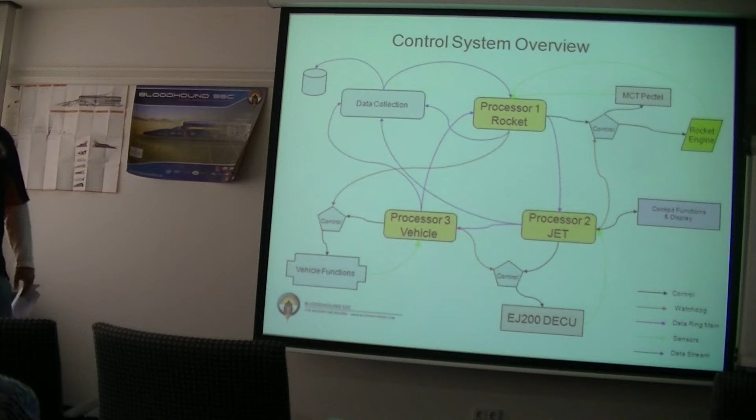All of the computers send data to a central data collection point which is stored locally, and hopefully what they're hoping to achieve, though we don't know if it will be technically possible, is to stream all of the data from the car in real time over the internet, to provide participation for primarily school kids, but of course for everyone.

So they have cable running then? No, that will be wireless.

So if we look at the front wheel assembly, here we can talk about a few things. This is using double wishbone suspension, I think. I'm not sure, I'm not a big fan of that. But the other important things you've got in here, we'll start with the wheels.

For this project, they literally had to reinvent the wheel. There's never been a wheel that's gone 1,000 miles per hour, and the forces on the wheel will be about 50,000 G at the rim. So it's got to be incredibly strong.

Initially they thought they were going to have to use titanium. More recent studies found an aluminium alloy which they can use, which should be able to withstand the forces involved. The next problem is the brakes.

It's a very heavy car. It'll probably be a bit less than 7 tonnes when they want to brake it at the end of the run.

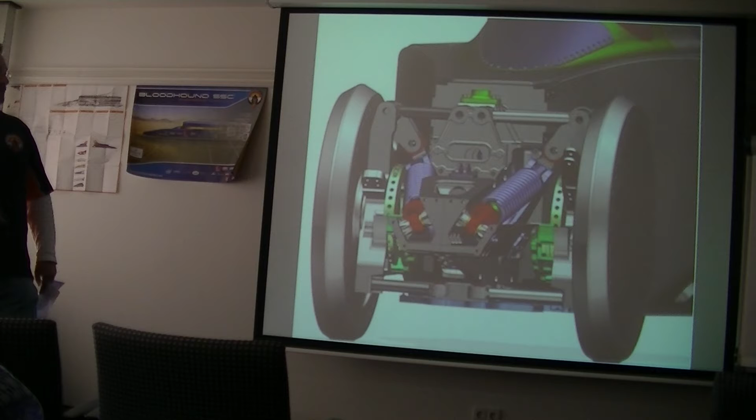So they're going to have to use ventilated steel discs, not dissimilar to what you've got on your own car. But they don't have to be that good, because on the desert, metal wheels on soft sand have almost no traction anyway, so they don't have to brake very hard at the end. Most of the braking, as we'll see later, will be done aerodynamically.

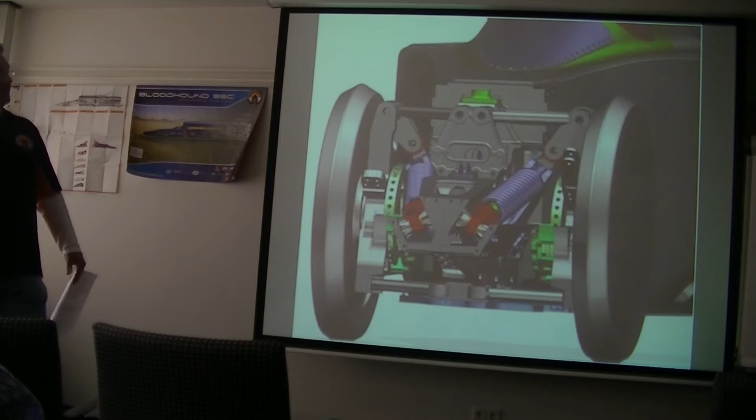So, onto the cockpit. This is, of course, Andy Green's office. He wants to be safe. How's he going to do that?

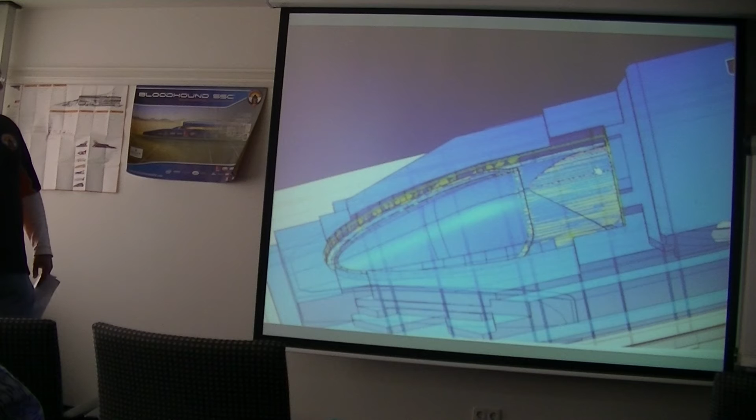They're making a monocoque, just like Formula One cars, but quite a lot bigger. This is a CAD drawing of the mould, and here it is in reality about 2 months ago. This has now been machined down. I saw a photo of that in the presentation I saw yesterday when I visited the club, but that's not online yet. So they are going to machine this into the shape they want, then create a mould, and then create the monocoque on the inside of that mould.

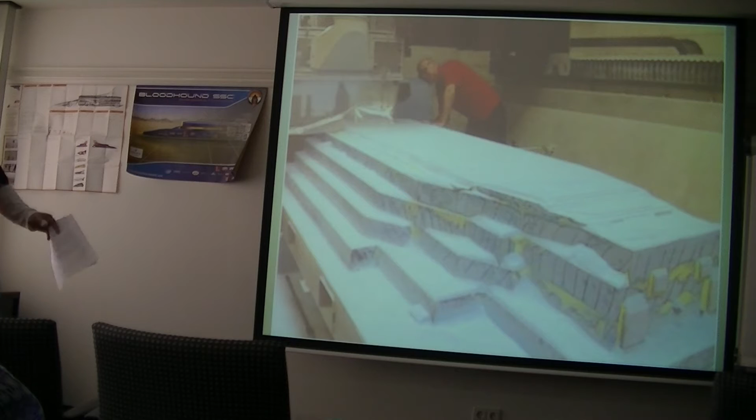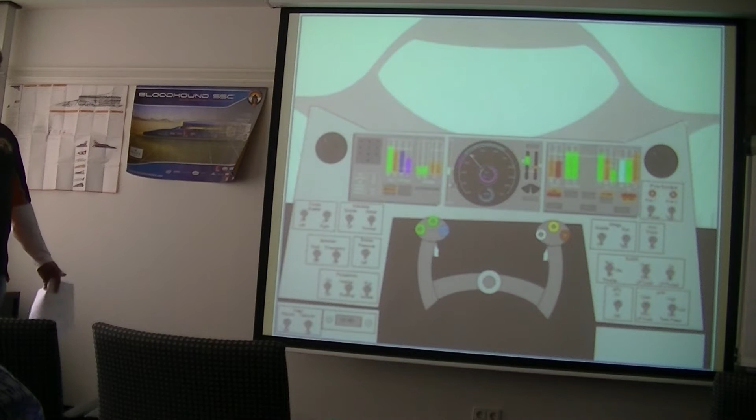This indicator here will actually show him where he is on the track, so he knows when he's going through the measured mile, and also knows when to activate the rocket, which is absolutely critical.

As you'll see in the video that's coming up, there's also an indicator to show the status of the air brakes, and these are more pressures and temperatures.

Lots of buttons on the control column as well. The two green ones are the parachutes, the blue one is the air brakes. There's an abort button and communications buttons. He's also got a brake pedal on the left and an accelerator on the right, which controls the jet engine.

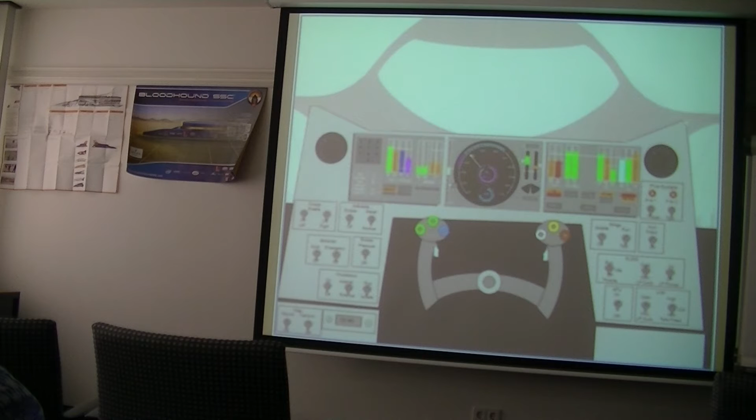The rocket will be controlled by triggers on the control column. No missiles? No missiles, no missiles. What does the abort button do?

It basically shuts everything down. No eject.

Well, very good. This is why we don't have an ejector seat. Why Bloodhound is not fitted with an ejector seat.

Imagine the car is doing 1,000 miles an hour and there is an emergency and Andy is ejected. The instant he is ejected, he'll be subjected to a wind force probably in excess of 10 tons. That would be totally unsurvivable.

An alternative that is sometimes suggested is to eject the driver in his cockpit so that he is in a sealed unit and protected from the air pressure. This could be done, but it would be very heavy indeed and very complex. This approach could have reliability problems because all of the systems that lead into the cockpit must be extremely reliable, but also instantly detachable in the event of an ejection.

Another reason why ejection is not something you can rely on is that when something goes wrong in the car, it will happen very quickly indeed, and it may well be impossible for a computer system to react quickly enough. And if it tries to do so, it is much more likely to respond to a false alarm. On the Thrust project we had 3 false alarms, and if we had used an ejector seat, that would have been 3 occasions when we would have ejected Andy and quite possibly killed him.

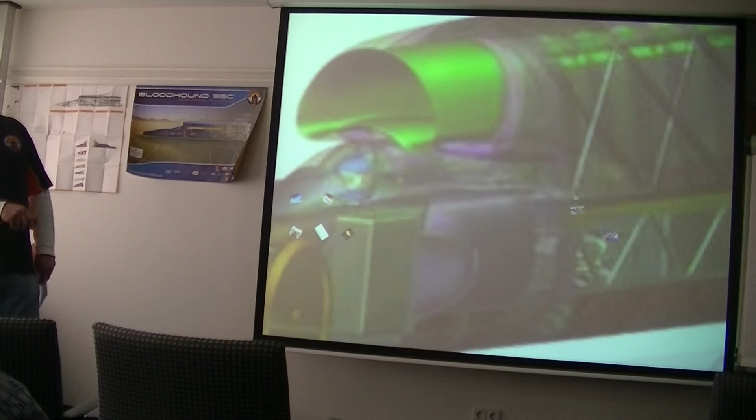So, onto the midsection here. You'll be able to just see here we've got water tanks. These are to cool the Formula 1 engine, which we'll get onto in a minute. It would have been too complicated to figure out airflows and stuff for a normal radiator, so we're going to use ice water to cool the Formula 1 engine.

Directly behind Andy is the oxidizer tank for the rocket, and then behind that is the Formula 1 engine, which will act as the pump to pump the oxidizer to the rocket.

That's what it looks like. It's a Cosworth V8 from, I think, this engine which was actually racing on a number of Formula 1 cars in 2010. It produces nearly 800 horsepower, but 2 people can pick it up. It's incredibly light.

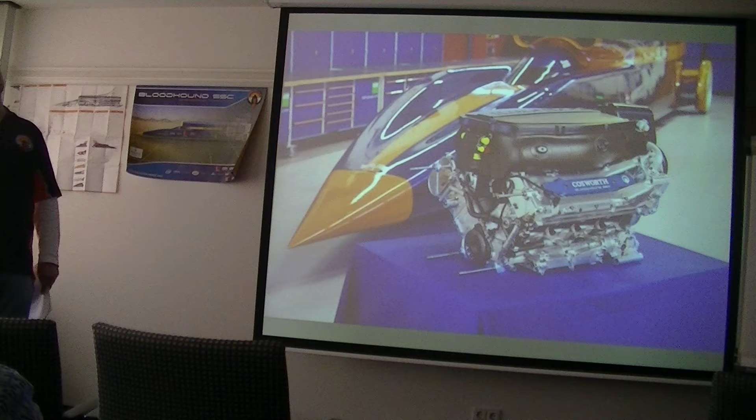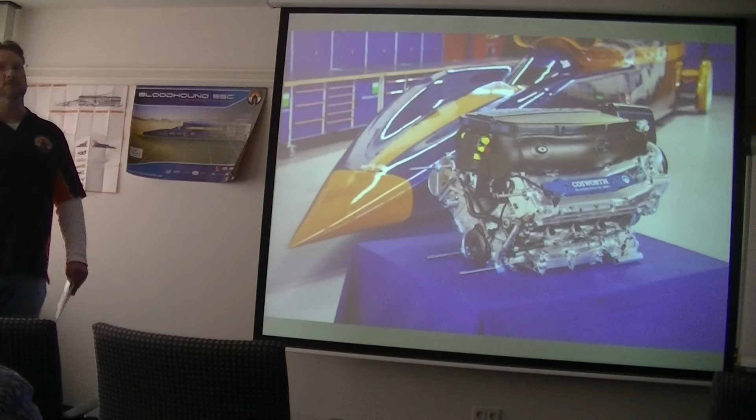If you're wondering about the time and when it will survive, well, it's only going to run for about 15 minutes, 60 times, and it's also going to be just power on and then power off. So compared to what it has to do in a Formula 1 car, it's very simple. The expectation is that they'll use one engine and one engine only during the life of the car.

This is a view from the top of the engine, the Formula 1 engine bay. Here you see the oxidizer tank. That goes here into the pump, which is under here, which pumps it through this tube at 1200 psi. It moves nearly 500 litres at 1200 psi in 20 seconds. So that's why you need 800 horsepower.

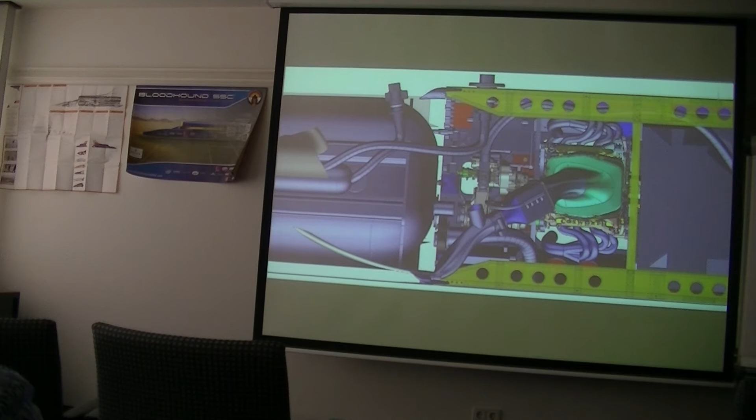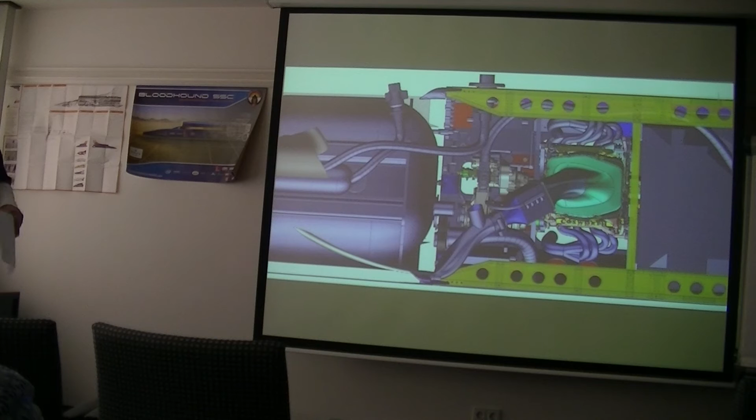The Formula 1 engine's air intake will be just there, under, between the canopy and the jet intake. That will be very warm air, so there's a cooler to cool it down, and then the exhaust will just be pushed out the bottom of the car. Behind that is the jet fuel tank. It's very critical, that cooling system, because if this oxidizer tank gets too warm, which I'll talk about when we discuss the rocket, the hydrogen peroxide, which is the oxidizer, will decompose and basically it'll blow up. So it's very important that we keep that cool.

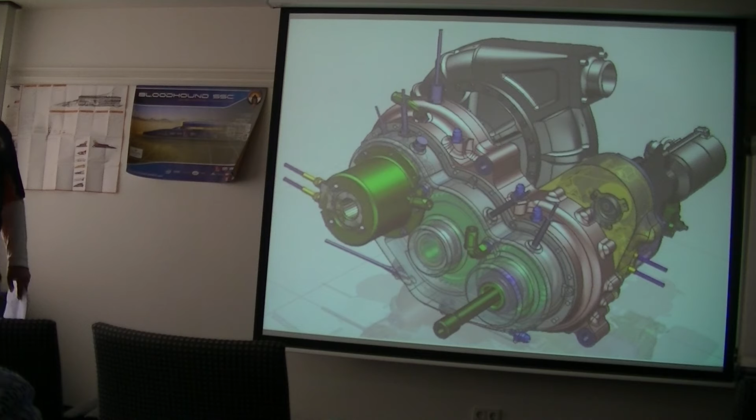This is a close-up of the gearbox and pump. The gearbox is necessary because we need both the Formula 1 engine to run at its optimal speed to produce the maximum power, and the pump needs to run at its optimum speed. The Formula 1 engine is 18,000 RPM, the pump is between 9 and 10,000 RPM. So we need a gearbox to do that, also a pump for the hydraulic system.

The rear of the car is actually also in 3 sections. You've got the lower rear chassis, the upper rear chassis, and the rear wheel assembly. Also the air brakes are here.

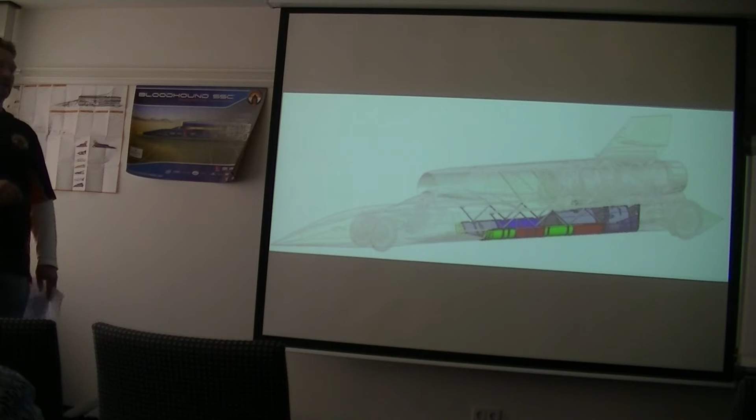Who's building this? This one's been built by Hampson Aerospace. They're all aerospace companies. The composite tub is being built by people who also build composite cars for Formula 1 and stuff.

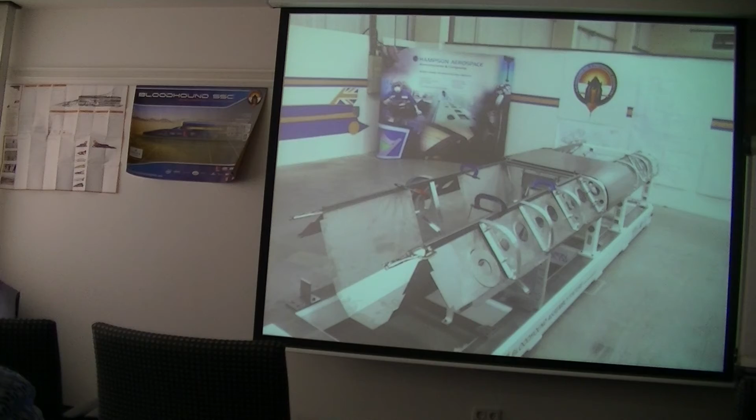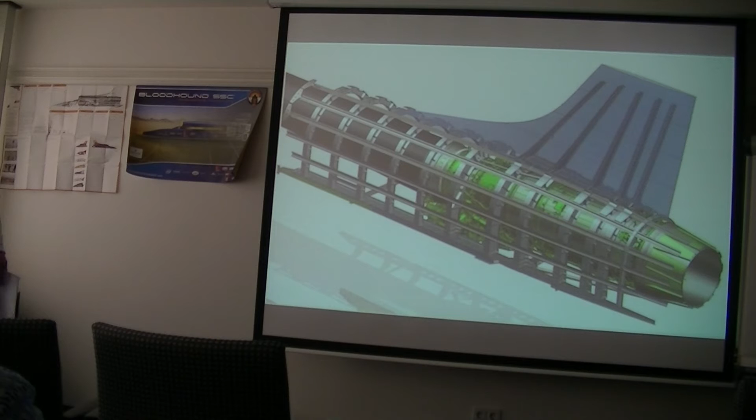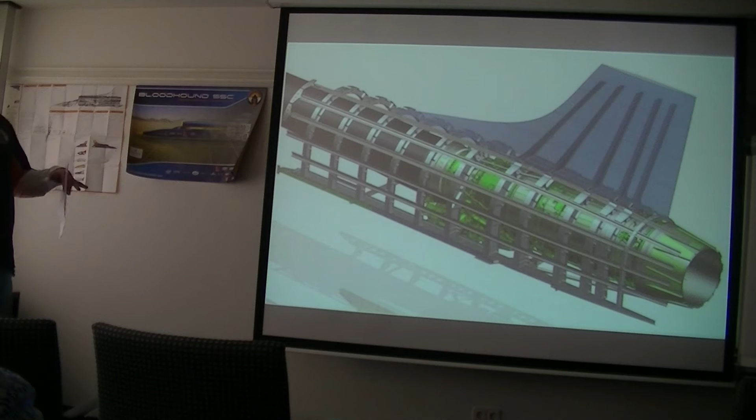One of the problems is that they first assumed if they had a skin which didn't take structural load, they'd be able to just take off panels to access the jet engine. Now that the skin is going to be a structural part of this component, they won't be able to do that. They'll make hatches so they can access things they need to access all the time. But if they need to do major service to the jet engine, they'll actually take this whole bit of the car off so they can access the underside of the engine.

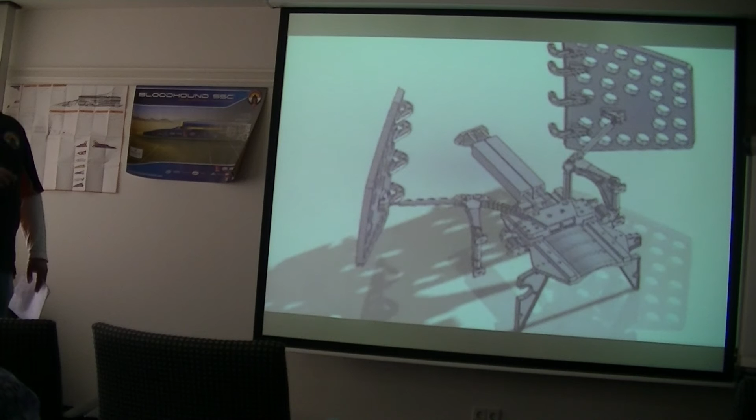Well, we'll go on to the engine before I go to the rest. Oh, first the air brakes, sorry. The air brakes will look a bit like this: 2 hydraulic cylinders, and when they're closed, this will be extended, and then it will retract to extend the air brakes.

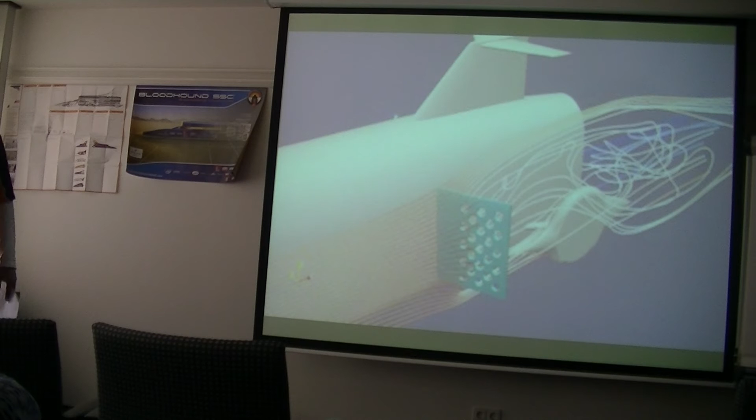This is initial CFD testing of the brakes. They first tried a solid air brake, but that produced so much turbulence behind it that it would have ripped the rear wheels off. So they put some holes in it so that there's nearly as much drag, but the turbulence is not as violent.

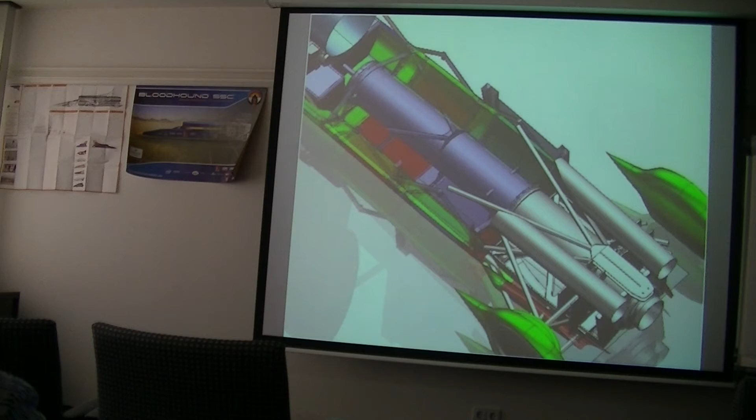The jet engine. This is an EJ200 jet engine from a Eurofighter. Bloodhound Project has 3 of these. They were 3 of the 4 engines on the 2 prototype Typhoon jets. And that's why all of the instrumentation and stuff is on the underside—on the Eurofighter, that's the easiest place to get it.

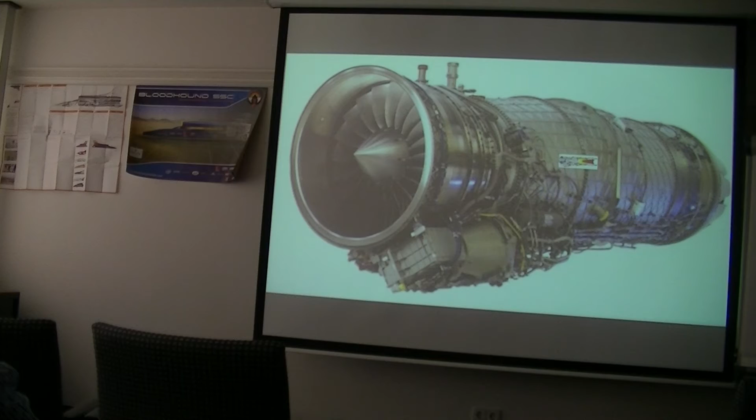For Bloodhound, that's problematic. For those of you who don't know how a jet engine works, this is actually a turbofan. The core is the jet engine, and at the front here you've got the fan. The fan blows air not only into the core but also around the core, very similar to what you see more visible on commercial jets. But in the military engine, this has the advantage of mixing cold air with hot air, so you get a lower infrared signature from the engine.

The air gets pushed in here, it goes through a compressor, pressed down, fuel gets added to it, it burns. The turbo bit is the turbine at the back here which drives the whole mechanism. And then, being a military engine, you can also throw extra fuel in at the back to give you even more thrust—the afterburner, commonly called afterburner.

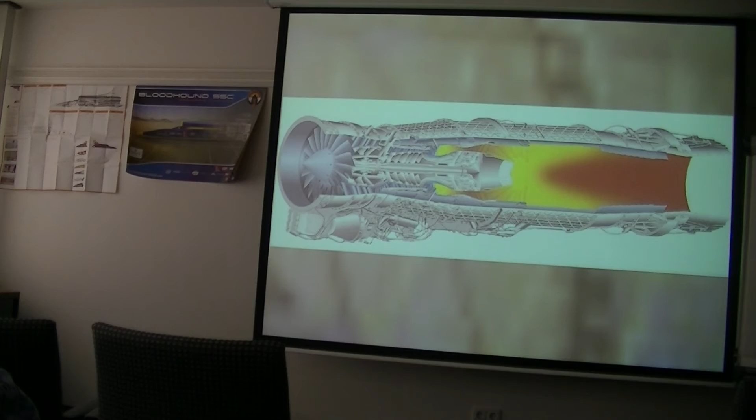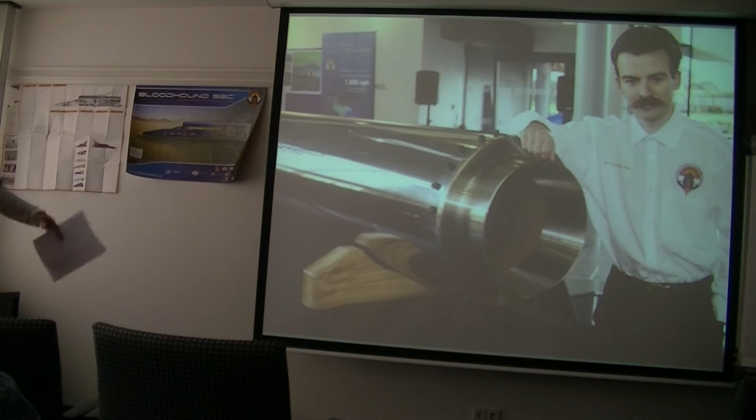This is a model of the rocket engine. It's about 45 centimetres in diameter—it's not small. And this is what it looks like on the inside. This is actually a model of the 6-inch version.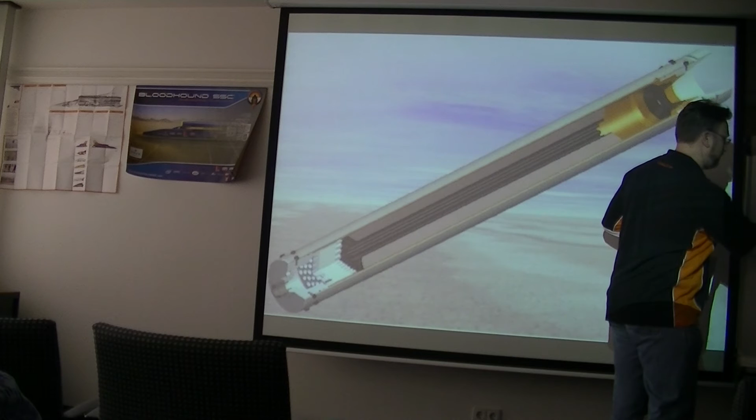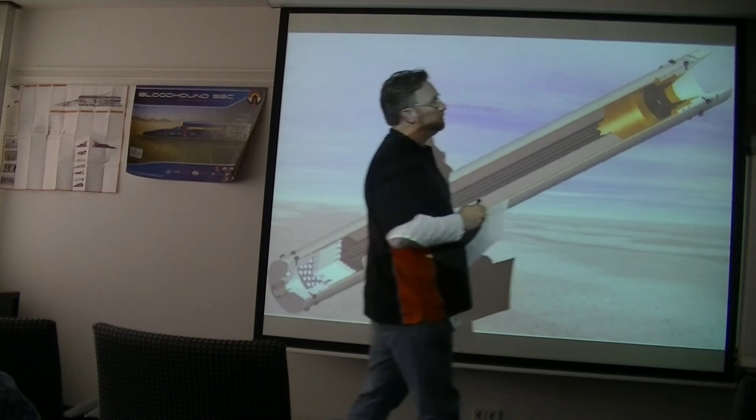The decomposition of the hydrogen peroxide produces water and oxygen, which is of course what we want for the rocket. It also produces a lot of heat, and actually, just this reaction in this rocket will produce about 4,000 kilos of thrust.

In the first runs in the desert, they'll use just that reaction, with no solid fuel, and they should be able to get up to 800 miles per hour with that, without the actual fuel of the rocket. The fuel of the rocket is in fins to increase the surface area so that more of it can burn more quickly. That will be used up in about 20 seconds.

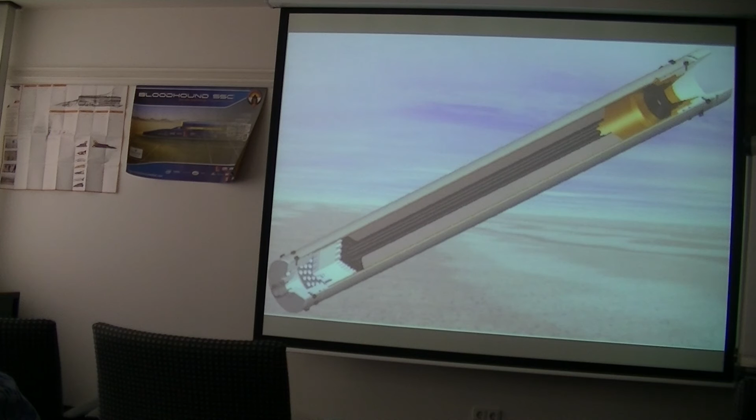And then, of course, the reason why it has to come in at 1,200 psi is because it has to be pushed out the back.

This is a test rig which will be fired this week. They were going to fire this for the first time - they've had a lot of trouble combining the Formula 1 engine with the pump and everything, but they're there now. They're about to do the first real tests of it. Here you see the rocket, the Formula 1 engine and the oxidizer tank.

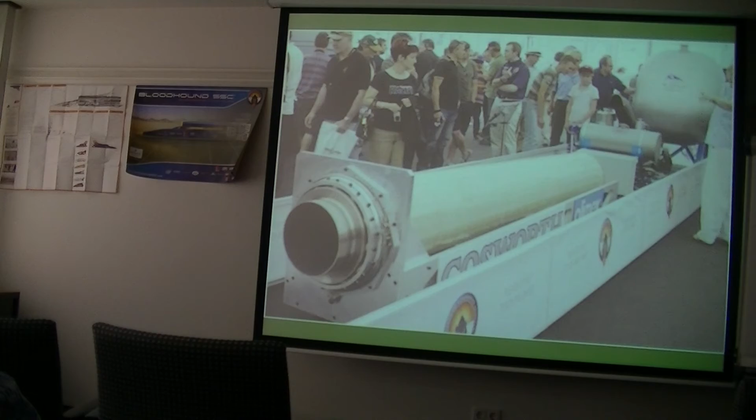This is a test, and this is at only 300 psi pressure. Here you see the water coming out and then it lights up.

Turn the volume down for this one. So it's bloody loud.

That, as I said, was only at 300 psi. So at 1,200 psi, it will come out even faster.

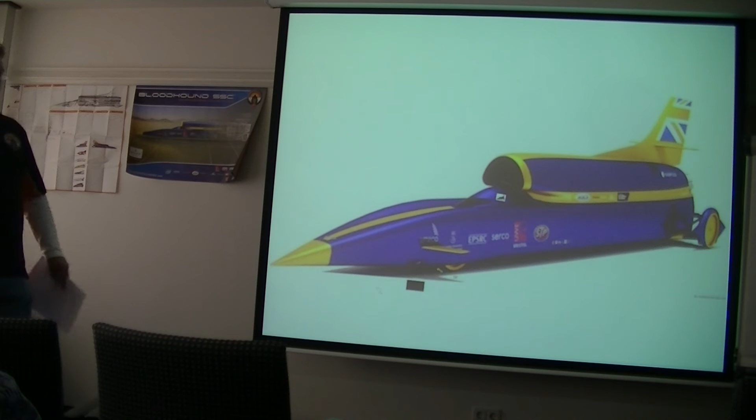So there we have the car. So what will it look like? Something like this - or this is a typical run, I should say.

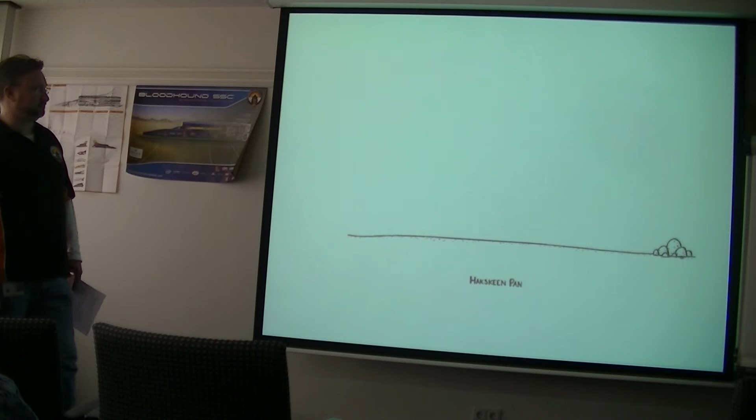Breaking 1,000 miles per hour is a massive task in itself, but it's made even more difficult by having to achieve it in a limited amount of space. The Hakskeen Pan has a very flat surface, but it's bounded by rocks. The space between the rocks is 12 miles long, and in the centre is our measured mile. This leaves us 5.5 miles either side to accelerate to 1,000 miles per hour and to slow down again.

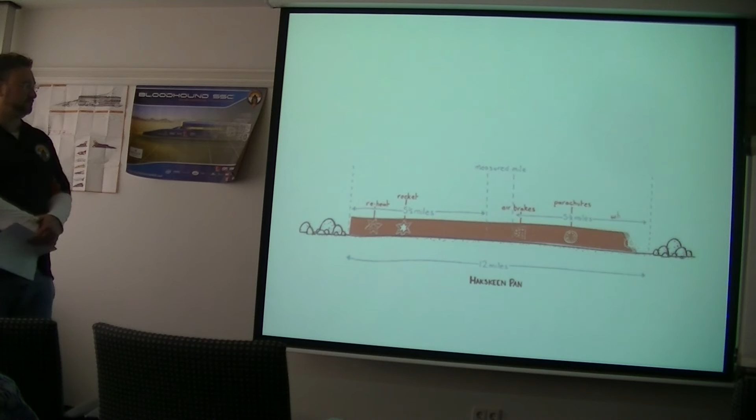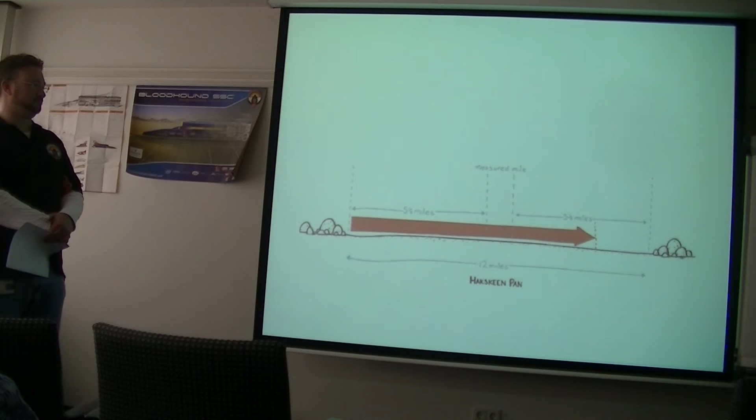It's critical that Andy reaches the start of the mile at exactly the right speed. If he fires the rocket too early, it will burn out and he'll be slowing down through the measured mile. If he fires too late, he'll still be accelerating through it and may overshoot the track. For Andy to reach 1,000 miles per hour in just 55 seconds, he'll have to time the rocket firing perfectly.

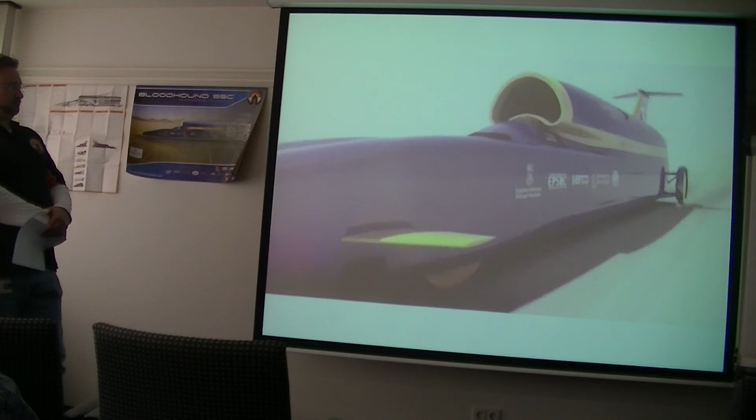Here's what a graph of an ideal run would look like. The jet spools up and the 7-ton car starts rolling. 12 seconds later the jet comes on to reheat. With the huge boost in power, the speed rapidly increases. 20 seconds in and we pass 200 miles per hour.

Just after 30 seconds in and at 350 miles per hour, the rocket is fired. Again, the car lurches forward, subjecting Andy to a force of 2G. The additional air being forced into the jet enables it to create still more thrust. In just a few seconds, we pass through the speed records set by Campbell, Breedlove, Gabelich and Noble, as well as the sound barrier and Andy's own record.

Bloodhound enters the start of the measured mile at 1,000 miles per hour. It reaches 1,050 miles per hour before the rocket burns out and the car stops accelerating. Having successfully passed through the mile, you'd think the difficult part was over, but it's actually just beginning.

The air brakes are deployed. He's now losing 65 miles per hour every second. The parachutes can be released at 500 miles per hour. It helps to slow him still further, but the remaining desert is disappearing very quickly.

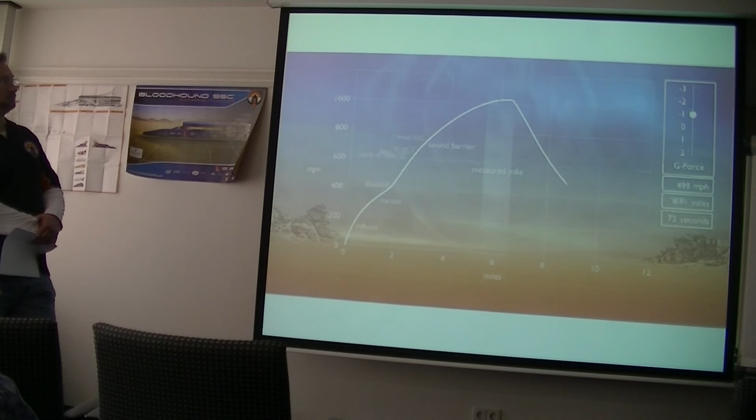Andy's foot hovers over the pedal for the disc brakes, but he can't use them until he's below 200 miles per hour, or they would shatter. At last, the wheel brakes can be used to bring the car to a standstill. The support crew will have less than an hour to ready the car for its return run, back towards the rocks at the other end.

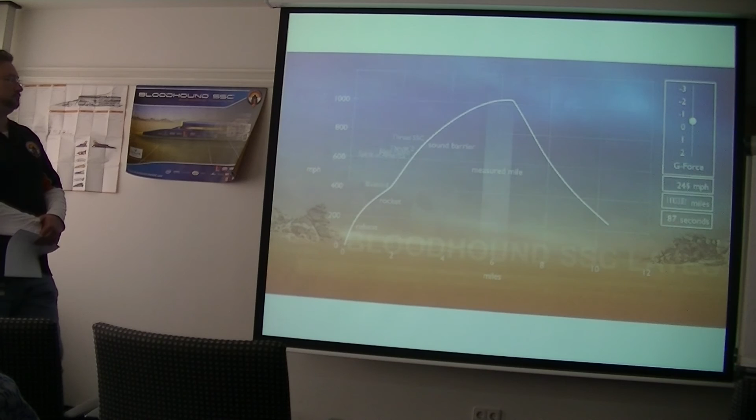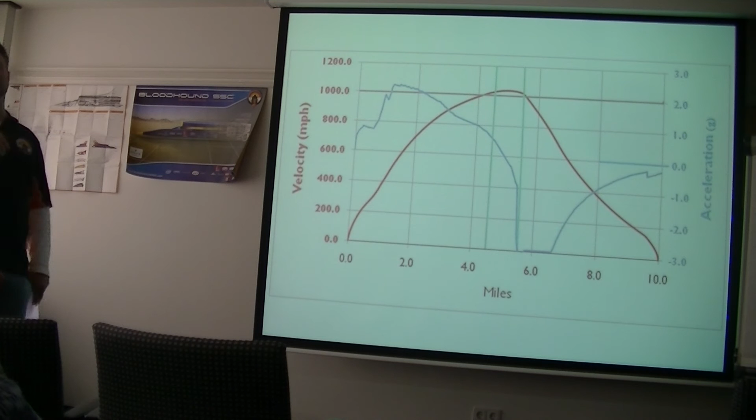So this is the official graph from Ron Ayres, which there was a mistake in the video. He talked about 12 miles, actually it's only 10 because there's a 1 mile buffer at each end. Ron Ayres would fit in at ING because this is all done via an Excel spreadsheet where he simulates the run with 1/100th of a second at a time per row and produces this graph.

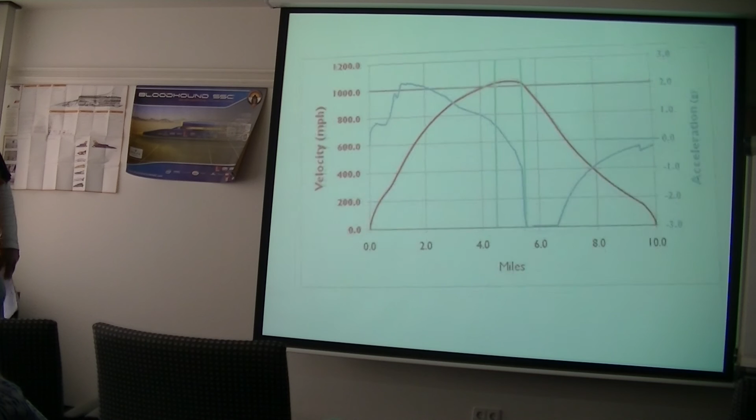This is the same as the graph which you just saw. One thing which would be better in that video is if they actually did it in real time. Then it would be really slow here, really slow, and then get really fast, and then slow down and slow down and slow down. So that's shown in this graph, which is the same but in time.

You can see it takes him 30 seconds or so to reach 600, and then another 10 or 15 to reach 1,000, and then he's through in just 3 seconds, and then he has to slow down very, very rapidly in order to be able to stop before the end.

Actually, at the end, you can see here it doesn't quite go down to 0. That's because they're going to actually drive the car around on the power of the jet engine. That saves them what they did with Thrust SSC - they picked up the back of the car and they towed it and they turned it around. But they've decided to take the simple option now of just letting Andy turn it around.

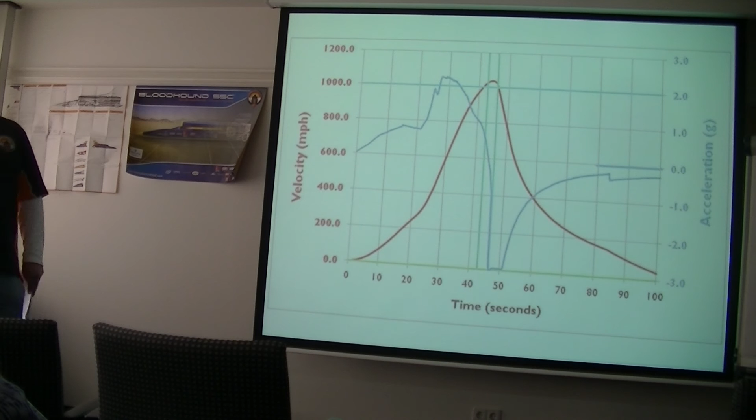The steering is not very sensitive. A normal car's got about 15 to 1 steering ratio. This car will have 30 to 1. So it's got about a 120 metre turning circle.

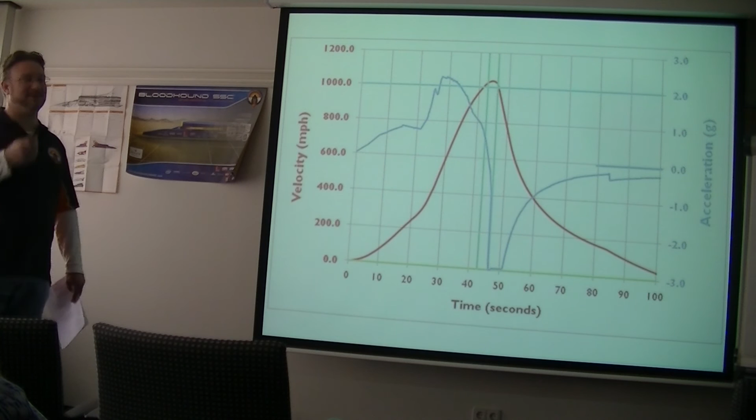This is what a run should look like. Bloodhound SSC, you're clear, engine start. Bloodhound engine start, ready to roll.

Also a mistake there, he puts his foot on the brake. Yeah, don't worry about that.

So will Andy actually wait for the fuel to run out, or will he stop beforehand? Theoretically, both will happen at the same time. To get the optimal acceleration, both will have to happen at the same time — that you start at a certain point and use the maximum amount of fuel so that it runs out just before you're through the measured mile.